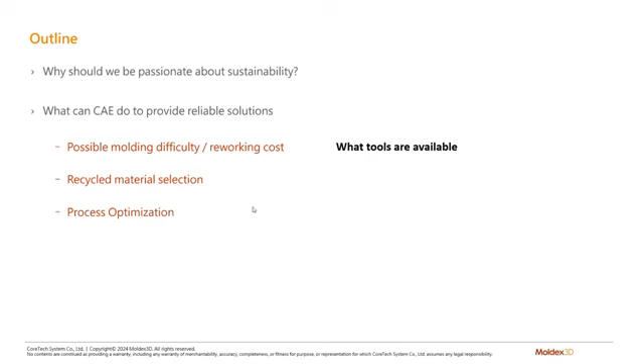But what about recycled material? So we'll look at what tools are available for recycled material selection, like the software sensitivity to material viscosity, which gets impacted by the regrind percentage. For process optimization, we'll show a live demo of Moldex3D DOE functions, as well as lightweighting options and using our iSLM for energy conservation.

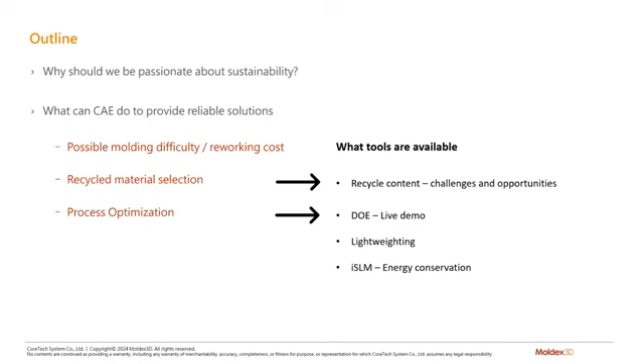So why am I personally passionate about sustainability? Well, over 20 years in manufacturing, I've always strived to reduce waste, cut manufacturing costs. However, I've witnessed and unfortunately been a contributor to waste in material at engineering trials and other costs related to troubleshooting. So that's me in a 2,500-ton press with parts larger and weighing almost as much as I do. So you can imagine the amount of material waste and defects in troubleshooting, as I'm sure many of you can relate.

I'm a longtime user of simulation technology, and I know that it offers a powerful avenue to model and test various alternatives and those what-if experiments. So it allows us to explore various scenarios and their environmental implications.

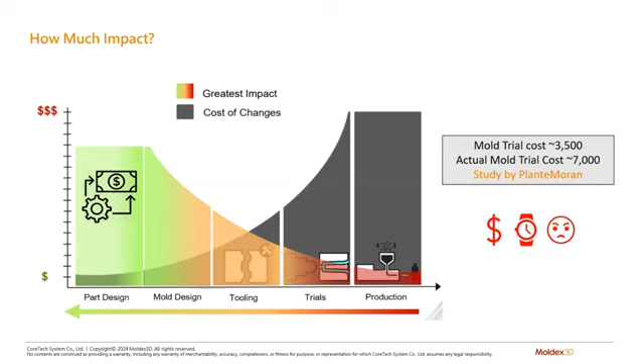So let's look at the impact of unnecessary costly and time-consuming molding trials. Best time to evaluate your part is before tooling is kicked off to avoid costly changes, including engineering hours at mold trials. So by effectively utilizing simulation technologies in the molding process, we can significantly reduce the time and costs associated with mold trials.

This optimization leads to more parts produced per hour, lower material waste, mold reworking costs, and utilizing machine integration through our machine mode can lead to faster time to market and energy savings. Integrating these tools with the manufacturing process enhances efficiency and profitability.

So the simulation software in CAE can offer valuable insights during the design phase, minimizing the need for repeated trials and errors. And these technologies help detect potential molding issues early on. You know, the reworking costs, material waste, again, leveraging these tools effectively can drive progress towards more sustainable and environmentally conscious manufacturing practices.

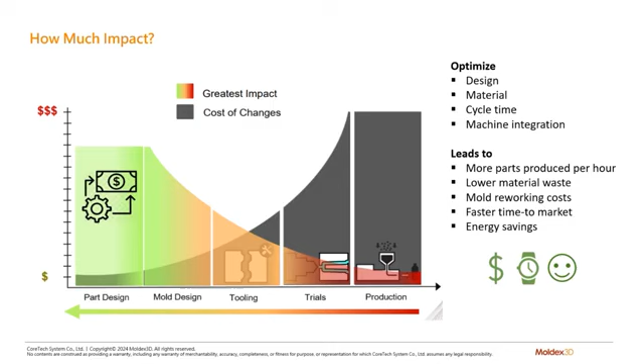So let's move on to recycled materials. Waste is gaining greater attention and solutions are in demand. So due to the exhaustion of resources and the requirements for environmental protection, all countries are advocating the concept of sustainable development, especially for plastic products to reduce and reuse.

Well, in recent years, various countries have proposed various regulations or policies hoping to achieve a balance between economic development and environmental protection and make full use of plastic products and economic activities with minimal environmental impact. Although many have been implementing the concept of design for recycling and some have already succeeded, it still remains a challenging task.

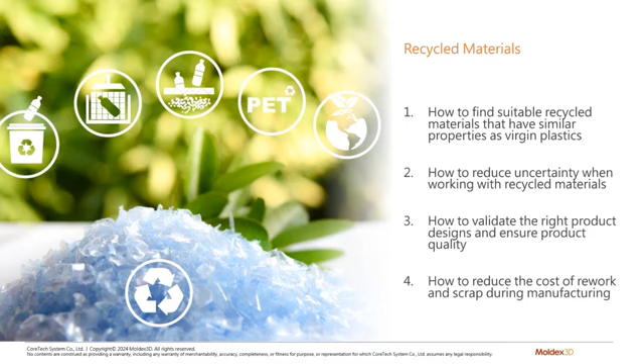As a designer, you're very likely to face these problems during product design process, such as how do you find suitable recycled materials that have similar properties as virgin plastics? How to reduce uncertainty when working with recycled materials? How to validate the right product designs and ensure product quality? And how to reduce the cost of rework and scrap during manufacturing. So these problems may seem daunting at first, they are, but they will be a lot easier when you have the right tools.

Choosing the ideal materials in the design phase is crucial to reduce the failure rate in production, and it guarantees good molding behavior. However, recycled materials have very different physical properties compared to virgin materials, and that's due to the molecular structure, breakdown, and the number of regrind cycles.

So to get accurate material data, you can submit a material testing request to Moldex3D's Material Characterization and Research Center. This is equipped with high-quality measurement instruments and ISO accreditation. Our Moldex3D experts will run controlled measurement tests on the provided recycled material and virgin material.

Material data will be available via a custom app, which will then include shear viscosity at 5 different mixing percentages and how shear viscosity will be affected by the number of recycling cycles. This will help you find the blends with similar processing properties to the virgin plastic.

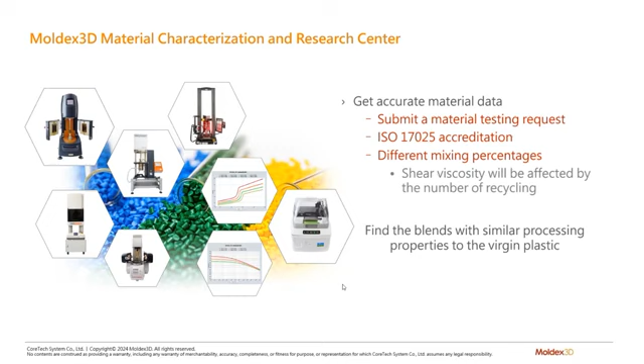So let's look at the case in this automotive bumper. Because this bumper is so large, we need to pay attention to the differences in flow behavior, the sprue pressure, and the clamping force.

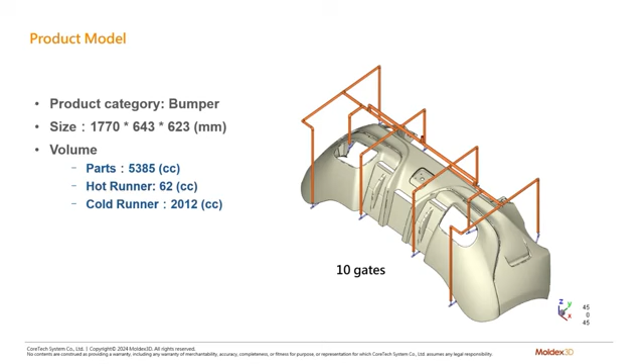So the initial molding conditions are based on the best conditions of virgin material. It is worth noting that, different from the phenomenon that the viscosity of recycled plastic decreases, the viscosity of the recycled PP selected here is larger than that of the virgin PP. In the process of remelting the recycled plastic, there will be some chemical reactions that increase the molecular weight. Various reasons may cause the viscosity of the recycled PP to increase, but subsequent comparisons will only be made between virgin PP and 100% recycled PP.

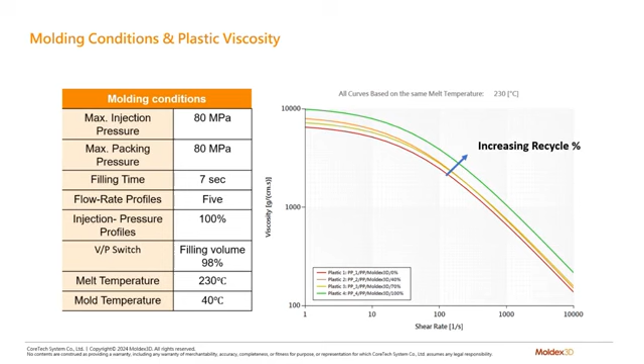Because the viscosity of the recycled PP is higher than virgin PP, it has a great influence on the filling behavior, especially on large objects. Compared with the flow behavior of virgin, the recycled has obvious hesitation in the center and on the edges, both sides of the bumper. So these images are showing the iso contour of each time step in the filling. The smaller distance between these curves shows a slowing down or a hesitation in the flow.

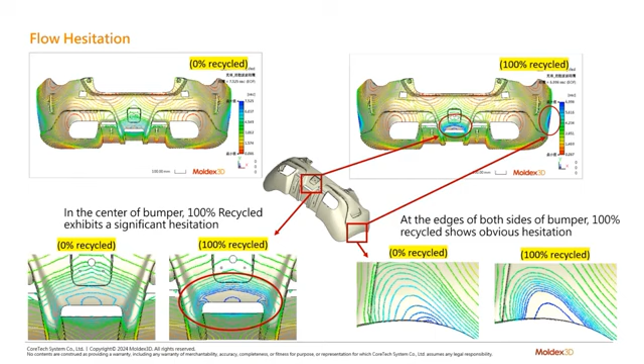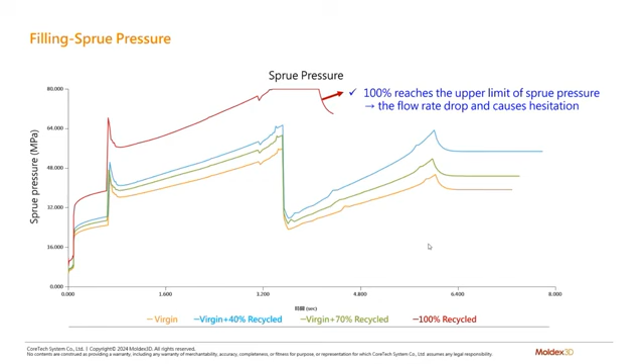So with 100% recycled resin, you can see that the sprue pressure reaches the upper limit of the injection machine and plateaus, so the flow rate drops and causes that hesitation. Because the sprue pressure of 100% recycled content is the largest, so is the corresponding clamping force. If the clamping force is not enough, it is easy to cause flash.

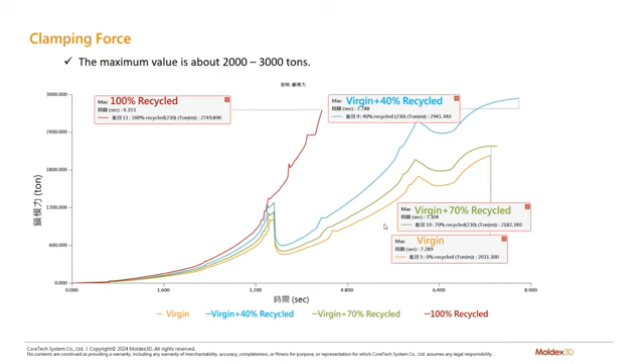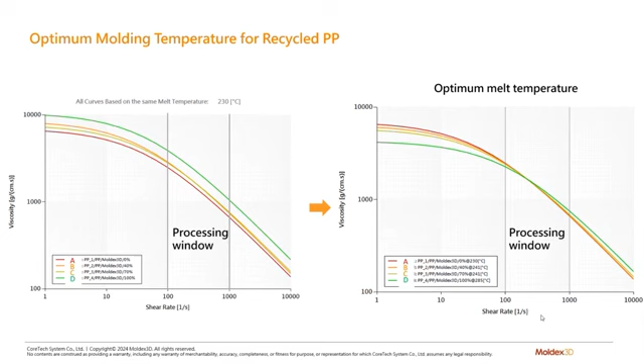So to solve the filling problem caused by the high viscosity of the recycled PP, the most convenient method is to adjust the melt temperature. Increasing the melt temperature of the recycled PP can reduce its viscosity to be the same as the virgin. In this way, the filling behavior of the recycled material is similar to that of the virgin. After increasing the melt temperature for the recycled, the melt front of the recycled is now similar to that of the virgin, so the flow front hesitation has now improved.

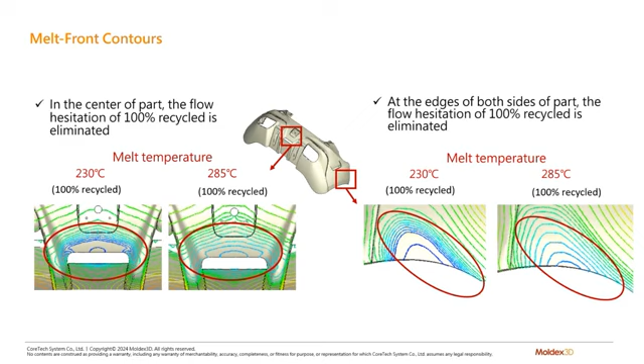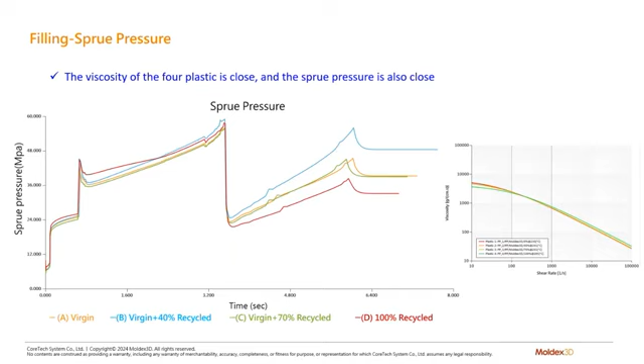Also, after increasing the melt temperature, the viscosity of the recycled is now close to that of the virgin. So the sprue pressure of the recycled is similar to that of virgin, and no flow hesitation can be found during the filling. And then, of course, that leads to the clamping force. A lower sprue pressure ultimately leads to a significantly dropped clamping force that now falls into the appropriate range, which happened to be 52% lower.

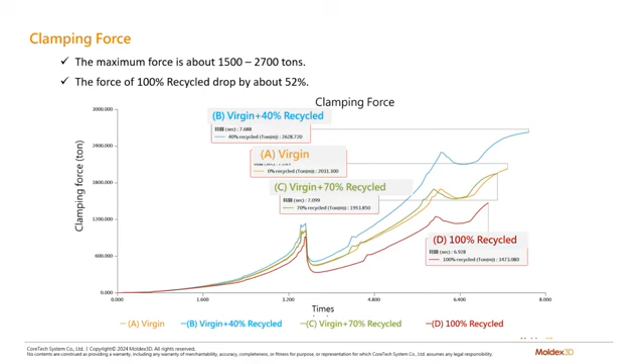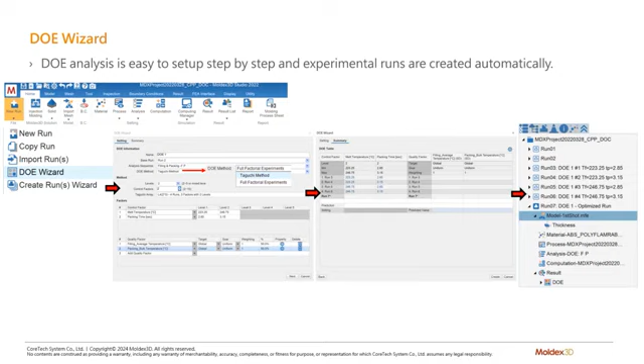So you might be thinking, well, how many iterations do I have to run to find an optimized condition for my part? This seems like a lot of work, right? Well, you don't have to spend countless hours setting up multiple iterations. Using design of experiments, Moldex3D has the DOE Wizard. A DOE analysis is easy to set up. It's step-by-step, and experimental runs are created automatically. So this is an amazing tool to optimize designs and process. Now I want to show you just how easy this is.

A lot of you might be familiar with this part. We've shown it a lot in our demonstrations. But you always want to start out with an initial run, which in this case was a full analysis. We're going to go to New Run and select DOE Wizard. From here, you just have your basic information. You can name your DOE, and you want to make sure that you are assigning your base run. In this case, we're going to use a full analysis with the Taguchi method.

So your levels are going to be your number of changes. As we go through these control factors, we can have a minimum, a middle, and a maximum. We can increase it all the way up to 5. But keep in mind, more levels or number of changes is going to increase your number of runs, which then increases your computation time. For control factors, I'm going to set it up as 4 control factors. And you can see we have quite a long list of different variables here.

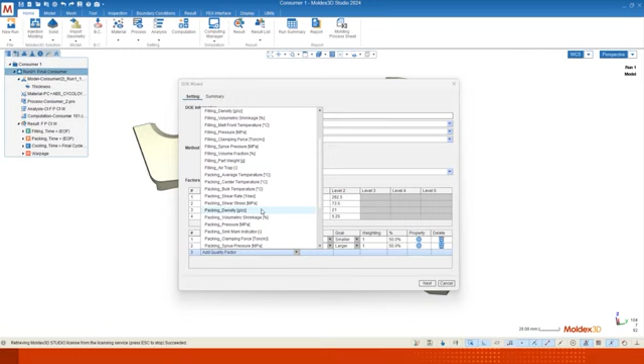Now for quality factor, this is what we want to evaluate or say maximize. Again, we have quite a long list of different quality factors. And as most of us want to know, we always want to know the total displacement, right? Maybe in this case, we want to look at part weight. Maybe we're looking at reducing the overall part weight. We can also look at volumetric shrinkage.

Now for warpage target value, we're going to put global, which means the overall part. But you can also set up probes. If you're wanting to strictly look at one location, if you're having a problematic area that's creating a warpage concern, you can set this up by probe numbers. We're going to stay with global. And of course, we want the smallest warpage amount. You can also set it up as nominal, where you have a target value that you want to reach.

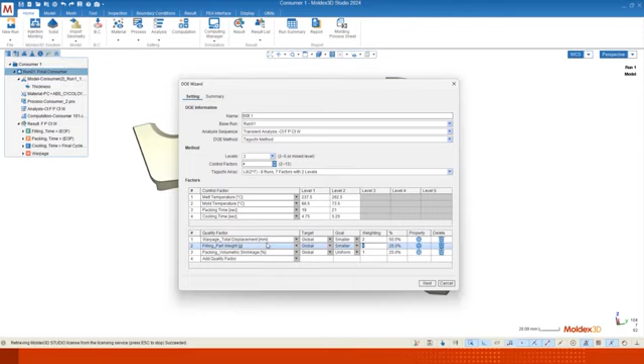Weight, we also want smaller. And volumetric shrinkage, we want it to be uniform. Now, the weighting of these quality factors can be adjusted. Right now, I have them all equally the same. But by changing this weighting factor, I can say that I want to consider warpage as a higher percent than the other two factors. Hit next.

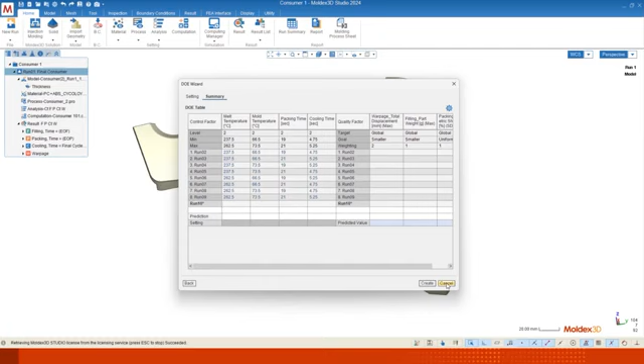And this now creates our matrix. So this is the number of runs that it's going to run by the inputs that you just gave it. And then run 10 is going to be your optimized run. So let's bring in the results. This was 9 additional runs, a full analysis on approximately a 2 million element count. It took about 4.5 hours for this entire DOE.

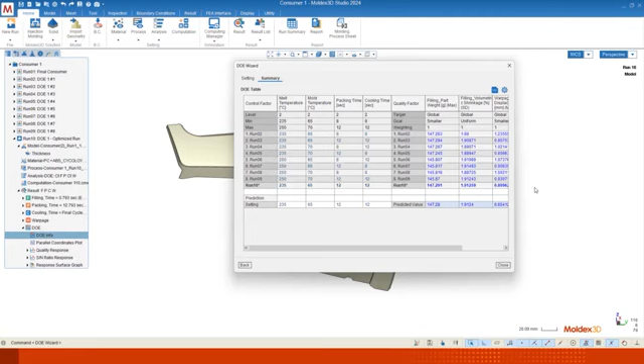So if I go down to the DOE results, in the DOE info, you can see your summary page. This gives you all of the outputs of your quality factors as well as your optimized run. If there's any additional factors that you wanted to consider, you can always add those in after you have run that analysis.

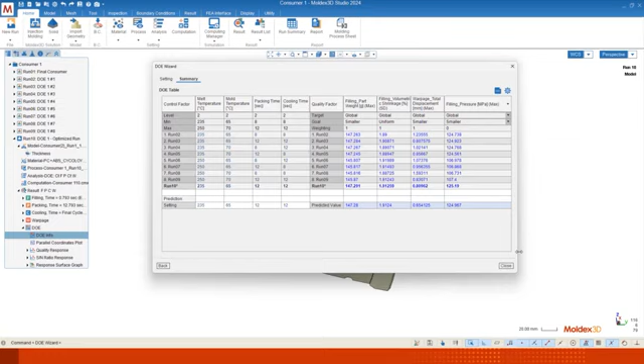So let's just say that you want to meet your minimum part weight. What parameters did those have to consider to meet a minimum part weight? But you're also jeopardizing your overall warpage. So these are just things to consider early on in your design phases. Maybe we want to consider the lowest possible warpage, but maybe we can meet in the middle for volumetric shrinkage because we haven't built the tool yet, so we can adjust that. Or maybe we can change materials.

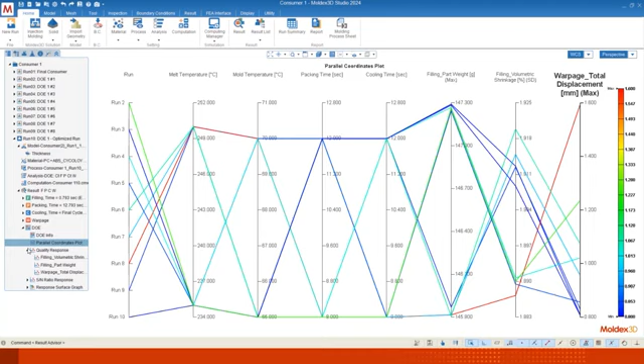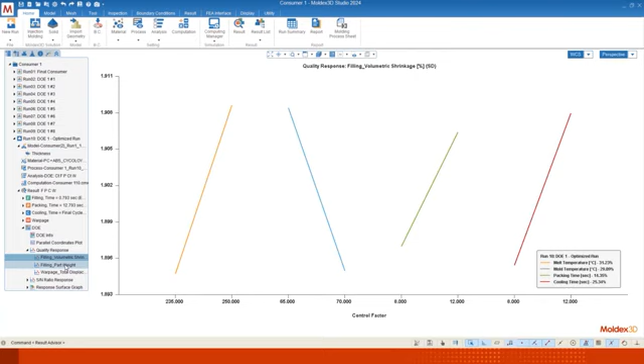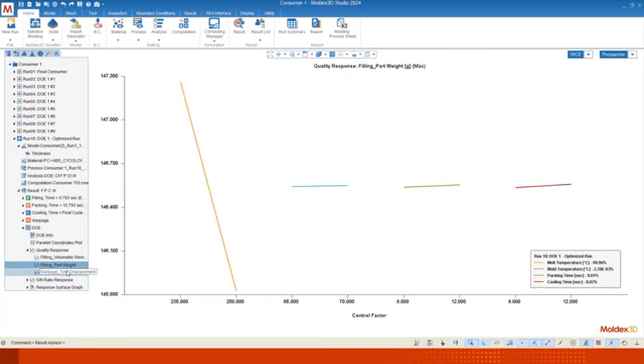In the quality response chart, this plot shows us which is more impactful. So in this case, all of your factors had a pretty big impact on your volumetric shrinkage. But if we go to part weight, the only one that had the biggest impact was melt temperature. And then for warpage, we have packing and cooling, which is understandable.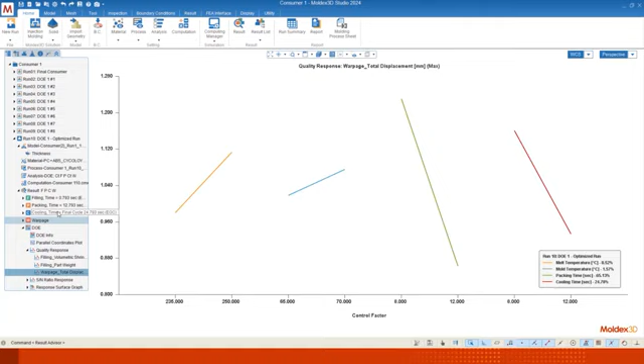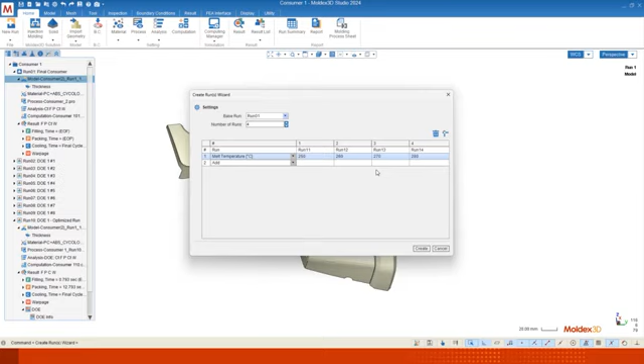Now I wanted to show you one more feature other than our DOE. On your initial run, you can also do a create runs wizard. So in this wizard, you're going to have your base run, and you can have a number of runs based on the same criteria. So say, for example, you only want to change your melt temperature. You can run several different iterations automatically with one click. Now, of course, this method will not give you an optimized run. You will have to go into each individual run to see your results.

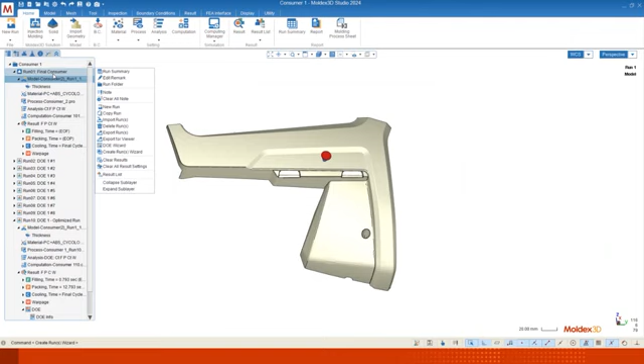Another nice feature is the run summary. So if you want to compare your results and your parameters in one quick, easy chart, you can select which runs you want to compare. You can also change your selected items. And you can export to an Excel file.

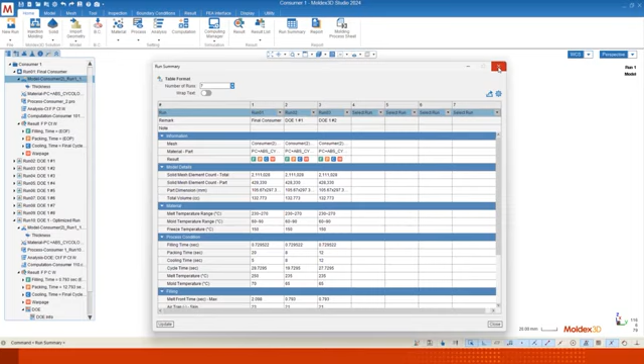Okay, the next topic is lightweighting. So lightweighting plays a crucial role in increasing fuel efficiency and reducing CO2 emissions, particularly in industries such as automotive and aerospace. So by incorporating things like foam injection molding technology, manufacturers can significantly reduce the weight of plastic components used in vehicles and other applications.

So as a result, lighter vehicle parts contribute to better fuel economy. The engines require less energy to propel the vehicle forward. And additionally, the reduction in material usage and weight not only decreases manufacturing costs, but also results in lower CO2 emissions throughout the product life cycle, thus helping us meet the environmental regulations and support global sustainability efforts.

So let's look at the example of chemical blowing agents, or CBA. So the great thing about foaming agents is that a standard injection molding process can be used and there's no need to modify the machine. It can easily be added with a mixing blender or hopper. So this chemical reaction forms low molecular weight compounds that act as blowing gas, and it introduces bubbles into the part walls. So let's look at the case of this box geometry.

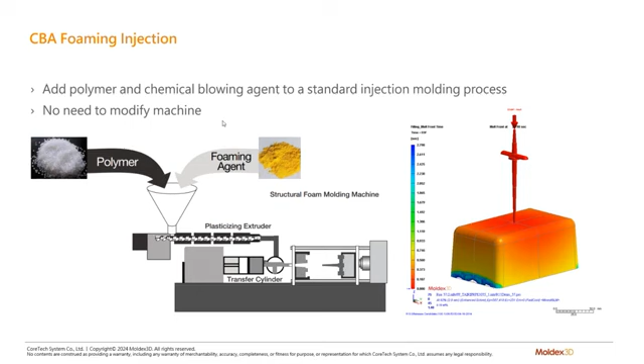So Moldex3D can simulate the nucleation and the growth of bubbles when the melt flow is injected into the cavity. It can calculate the bubble size, the number, the density distribution, the volumetric shrinkage. It can predict the interaction between the melt flow and bubble development. It can accurately predict the effects of bubble structure on part warpage, and weight reduction, as well as evaluate the core-back process.

So, of course, the bubble development within the part wall can vary from part to part. However, in the cross sections of this box geometry, the cell size of the actual part compared with the simulation results have very similar trends.

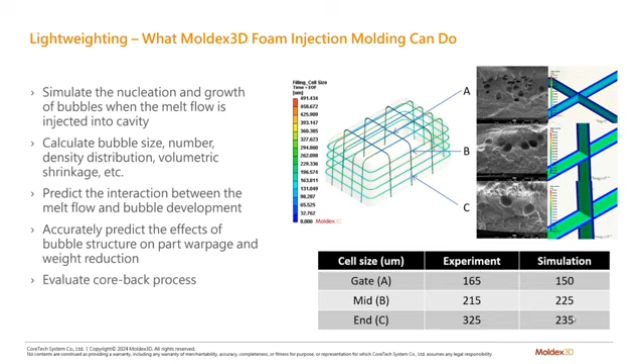So the advantages are manufacturing cost savings and quality improvement. You can reduce the weight by 6 to 12%, reduce cycle times 15 to 35% by using lower melt temps and mold temperatures, smaller tonnages, improve flatness and warpage, high dimensional stability, reduce stress in parts, and then, of course, a greater design freedom. You can use thinner walls and thicker ribs without any sink concerns. As shown here are both the results of simulation and the real molded part, the warpage direction, and the magnitude of the sink.

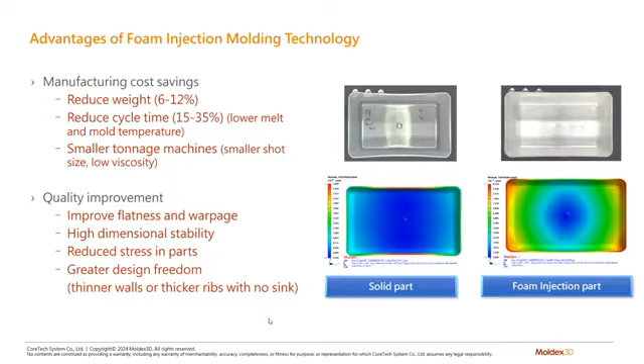All right, lastly, I'd like to touch on CO2 and energy savings calculations. So why do we need to support carbon emissions? Well, in support of global environmental protection, actions are taken to evaluate the environmental impact of human activities, ensuring compliance with EU standards for product production, and striving for goals like tax reduction.

In Moldex3D's iSLM, which is our intelligent simulation lifecycle management, our data management platform, users can collect power consumption records for the main supply of the injection machine and any auxiliary devices like chillers, hot runners, grinders, etc.

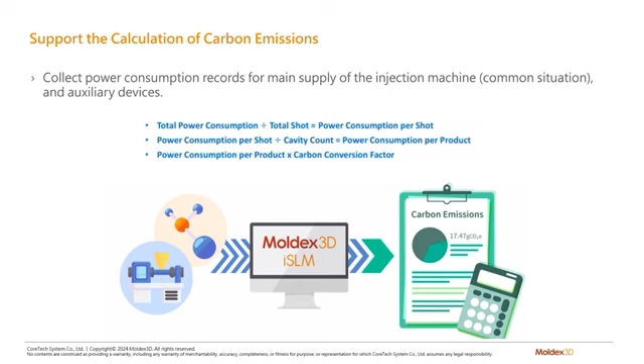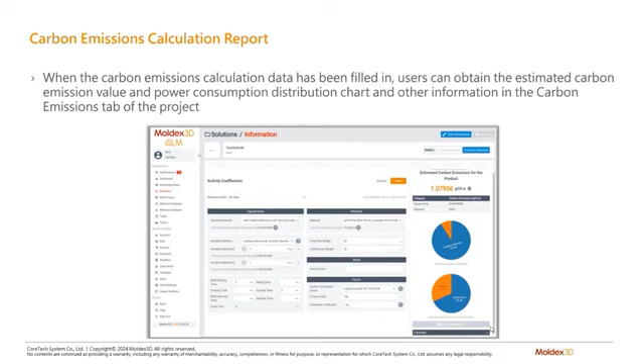So then when the carbon emission calculation data has been filled in, users can obtain the estimated carbon emissions value and power consumption distribution chart and other information in the carbon emissions tab of the project. In addition, the carbon emission calculation report in the solutions page can also be exported to an Excel file. We can take this one step further to communicate and compare your material carbon emissions when using recycled resins and create an action plan for your business and supply chain.